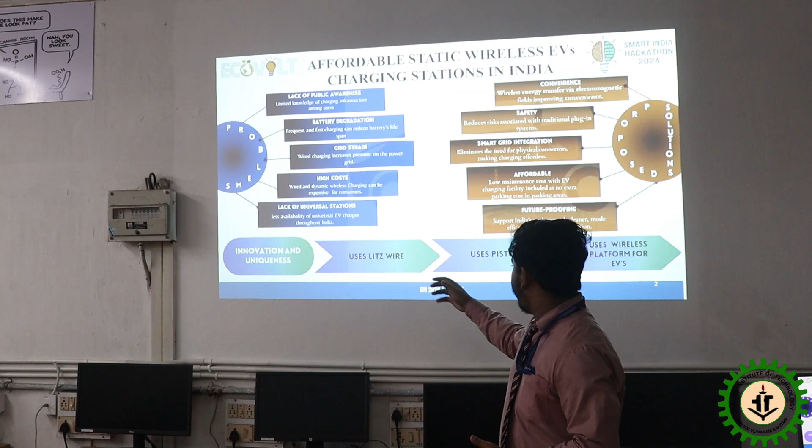In our innovation, we implemented Litz coil. It's a type of wire which reduces the resistance and reduces the heat, and uses piston for better alignment of two coils. So if we reduce the distance between the coils, then the time also is reduced. So we use the piston to reduce the distance between the two coils, primary coils and secondary coils.

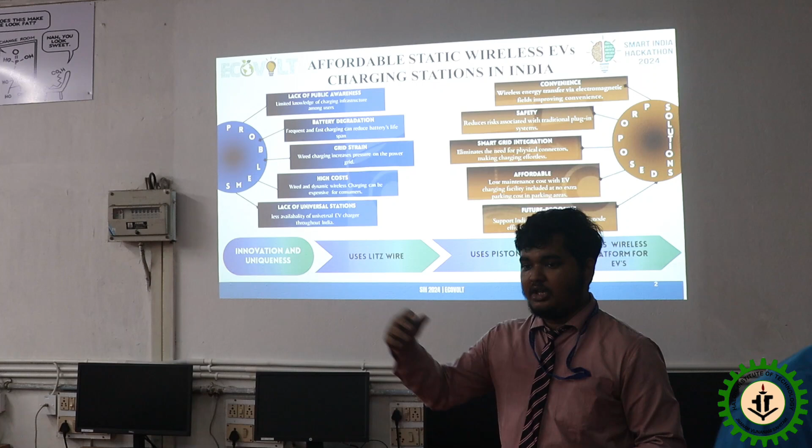It uses a wireless platform. If you park the car on the wireless platform and pay for the charging, it automatically charges the car. Thank you. Now I'd like to invite my co-speaker for further discussion on this topic. Thank you.

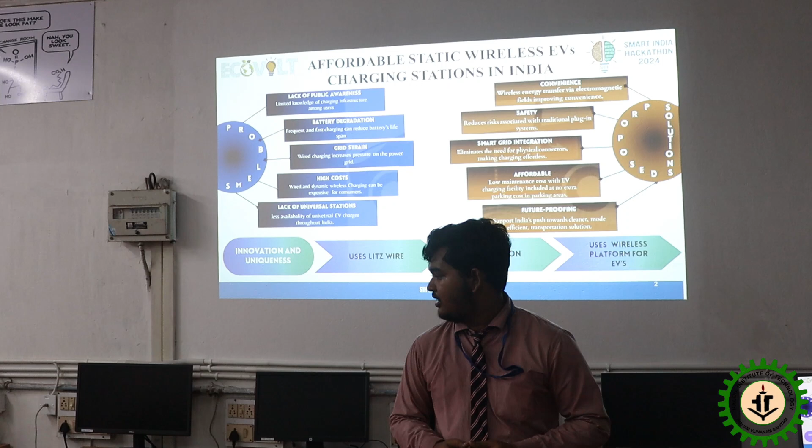Good afternoon, everyone. Thank you for giving me the opportunity to speak further on our topic. I will discuss the technical approach of our project. So, first of all, in this circuit, we are using an Arduino. The Arduino is used as a gate driver. It will control the gates. The four MOSFETs are used as an H-bridge, which will generate the AC current.

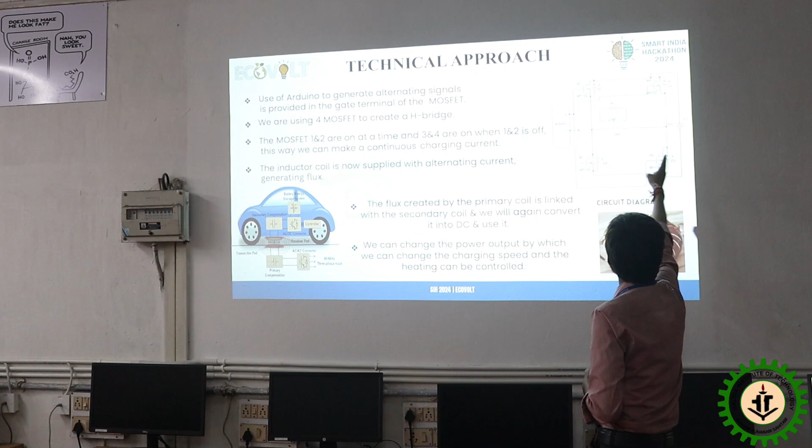Now, how will it generate the AC current? When MOSFET 1 and MOSFET 2 are in on condition and MOSFET 3 and 4 are in off condition, current will flow from left to right through the coil. So in that time instant, current is flowing in one direction. In another time instant, when MOSFET 3 and 4 are in on condition and 1 and 2 are in off condition, the current will flow from right to left through the coil. So current is changing direction.

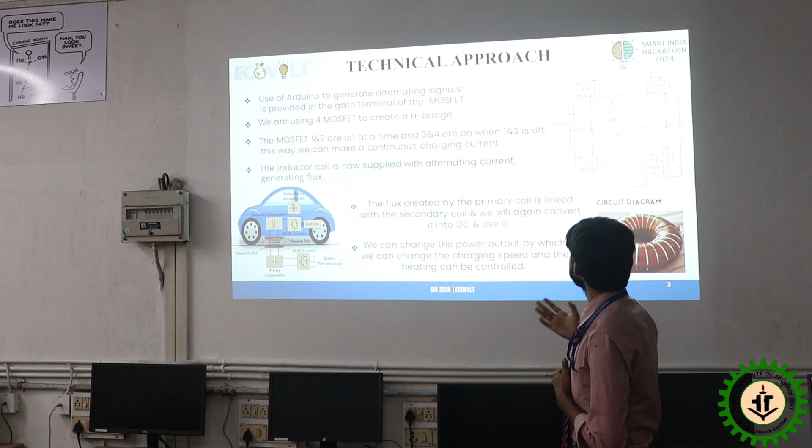We are changing this 50 times in 1 second, so we are generating a frequency of 50 Hz. Due to this AC current, flux will generate in the primary coil, which will link to the secondary coil, which is in the car. Due to this flux linkage, an EMF will generate in the secondary coil. As it is AC and the battery is DC, we need to rectify the current, and we will use a capacitor to filter the current, and after that it will go to the BMS.

The BMS stands for battery management system. It controls the battery overcharge protection and current. So this circuit is used in our prototype, and we can minimize the heating issue and control charging speed by changing the power output to the primary coil.

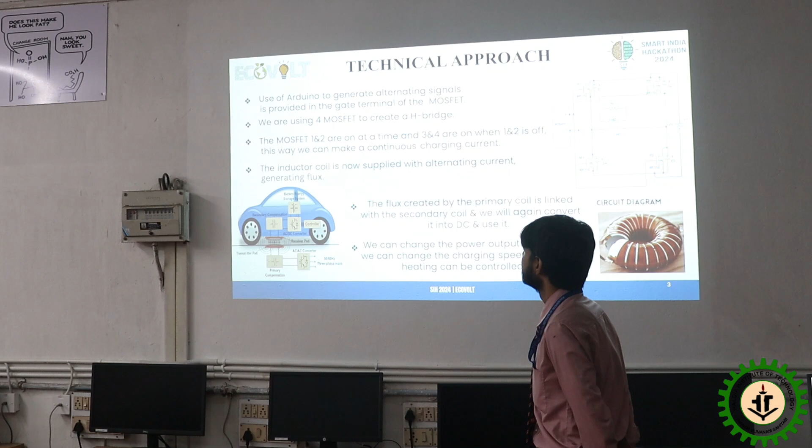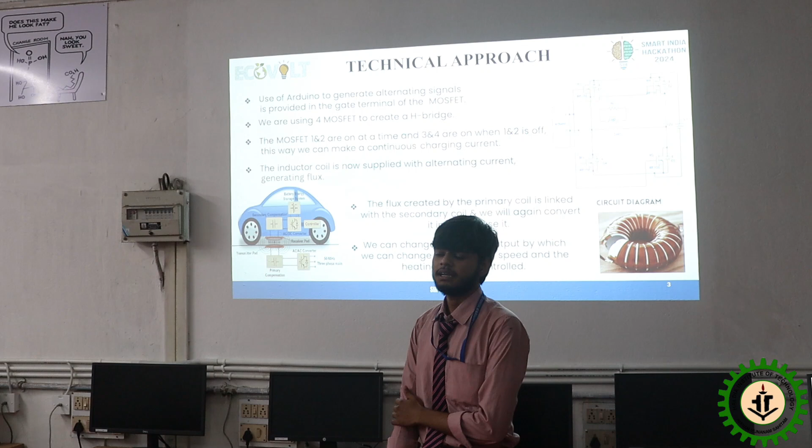...a lot of magnetic wave. What is that H bridge? So the H bridge we are using is an inverter, sir. So it is the inverter. H bridge inverter. You are charging DC. Yes, sir. Sir, the H bridge is used for generating the AC current.

You think about the power which your system is generating that is used in the battery. That power is important. Through electromagnetic waves, I think whatever you are generating is not sufficient to charge the battery. You take a small battery where less power is required, then you try to work on this high range battery.